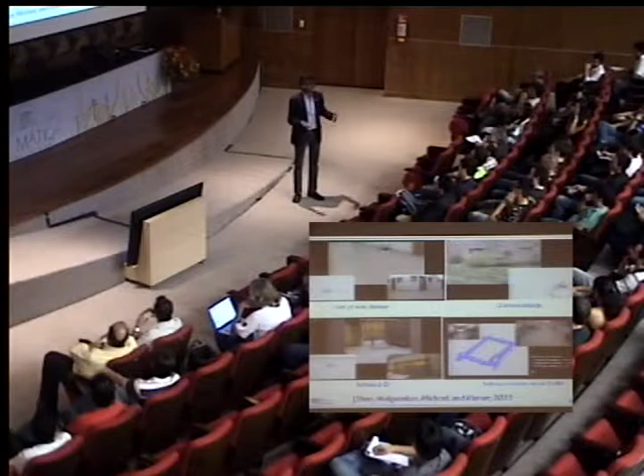So here, the reconstruction that you're seeing here, the map that's being generated here, is not being generated on board. On board, you only have sparse features, and you're essentially triangulating based on that. But if you feed all that data off board to another machine, then that machine can actually do this reconstruction.

And here the main challenge really for us is computational resources. If you can put a lightweight GPU on board, you can do all of this on board. And I think it's a question of time before companies like NVIDIA come up with processors that we can actually reduce to cell phone grade size and power constraints. And we should be able to do all this reconstruction, dense reconstruction, on board.

The one caveat about this is you really cannot use these maps for doing trajectory planning or obstacle avoidance. So in each one of these experiments, the human operator is essentially looking at what the robot sees and saying, go here, and then there. So the high-level planning is done by the human, and the low-level trajectory planning is done by the robot.

And that's because if you just use vision information, it's very hard with today's small processors to do a complete dense reconstruction of the environment, to do motion planning and to do obstacle avoidance. But you can do it at a finer level, the trajectory planning level. And that's sort of where this work is headed. I think it's a question of time before we can do all of this on board.

So in general, if you go outdoors, then you might think about using other sensors than just vision. One of the problems with vision, of course, is it doesn't work in the dark. It doesn't work when it's raining. It doesn't work if there's smoke. But lasers work there, and so our strategy here is essentially to use all the sensors that are available and then fuse this information when possible.

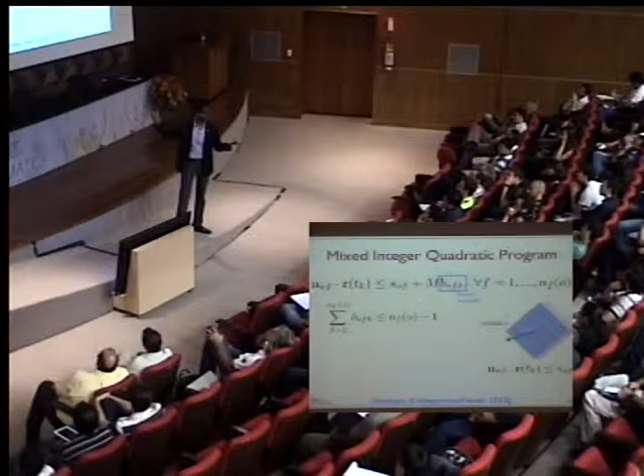So we're going to insist that the sum of the binary variables is at most n_f minus 1 for a particular obstacle. So that gives rise to this. So we essentially make sure that at least one of these for every obstacle is equal to 0. Right? And the others, I don't care. It can be 1 or 0, I don't care. So that's a mixed integer inequality. And now I rewrite my quadratic program, except in addition to this and this, I have a whole bunch of these binary constraints, which are obtained by these binary variables.

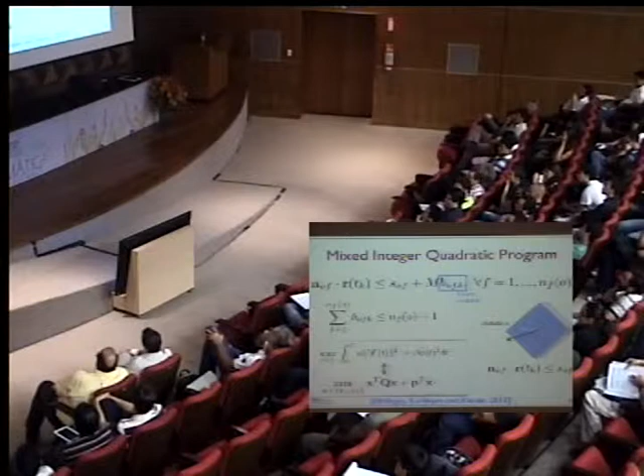So what's the problem with this? If you have n robots and m obstacles, one problem is that the dimensionality of the space increases linearly with n, which is to be expected, right? And there's no free lunch. Size of your quadratic program will keep increasing. But if you have good solvers, this is not where the problem is. The problem comes in really with the number of obstacles and the number of neighbors. So the number of potential interactions is n squared, and the number of binary variables you have to write for obstacle avoidance is n times m.

So if an obstacle has f faces, then for every obstacle you'll have f binary variables, and then you'll have m times f binary variables for your m obstacles. And if you have n robots, for every robot you'll have to have m times f binary variables. So the number of binary variables in an environment like this quickly grows very large, and it doesn't really scale that well. And that's the real problem.

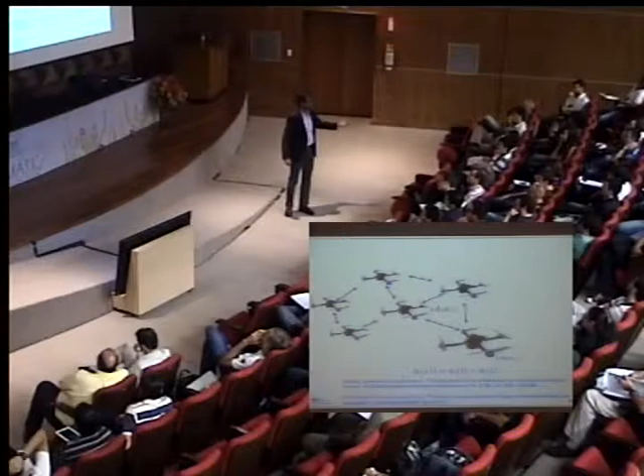So there are some robots that are aware of the global task, and the global task is specified as a trajectory in the position and yaw space. So imagine now you have 100 robots, maybe 2 or 3 of them know what overall trajectory needs to be followed, and the others are only keeping track of their neighbors, right? So you can show if this is a connected graph that in fact the entire team can follow the trajectory. So here's a cartoon video, if you will, work by Katie Powers that illustrates this.

So this guy here is a host for PBS, the Public Broadcasting Service in the US, with episodes called Nova that air every Wednesday. So this shows how the leader-follower concept works. So these robots are talking to each other, and David has essentially hijacked one of our robots and pulled out the battery, and he's basically commanding it. So that robot can talk but cannot do anything, right?

By manipulating that robot, he's essentially able to manipulate the team. Okay, this is not a swarm, but that's because my lab is quite small, but essentially it illustrates the idea. What he's doing with his hands is irrelevant. This is not a human-robot interaction experiment, but you know, he likes to do theatrics, and that's what you're seeing there. But this is a very, very simple idea. Same idea with this notion of anonymity, and this is really Matt Turpin's work.

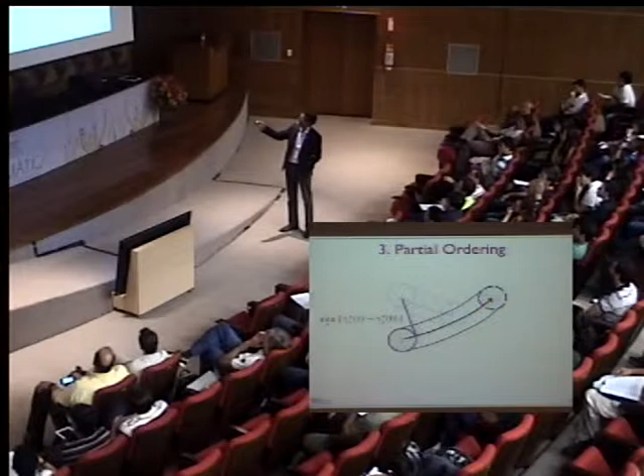Then the third, you have to essentially establish some level of prioritization or partial ordering. And there's a simple test for it, and this has to do with looking at the shortest distance separating the start location of J and this trajectory, which is this perpendicular distance, and looking at the shortest distance from the end point to this trajectory, which is this little thing, and asking which one is bigger, right? Is this less than 2r? Is this less than 2r? In this case, if that's the case, then J gets priority over I.

If this is the case, I gets priority over J. And it turns out in this case, this is true, right? This is actually less than 2r. So I gets priority over J, so this guy will go first, and that's how the priority is assigned. So once you do that, you essentially reparameterize your minimum snap trajectories so that I goes before J. All right, so this incorporates dynamics, it incorporates the best routing, and it solves the assignment problem, and this turns out to be order n cubed.

So for instance, this is just a simulation, but it shows you the kinds of things we can do. For some reason, this video is not playing. So you'll see, this is 100 robots starting from different configurations. They're told to go to goal locations, and on MATLAB, this can be solved in 2 or 3 seconds, in this fairly cluttered environment. Again, these are identical robots, and we're not telling them who needs to go where up front. So they're determining that, and they are finding safe solutions as they go through this.

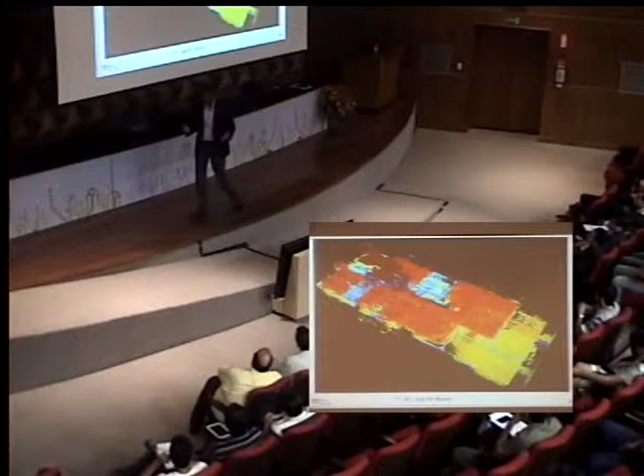And they collect the information, and there's a way to aggregate this information using a cloud of computers that might be located outside the building. You should be able to do this sort of thing just with large numbers. And that's one of our challenge problems.

So a related challenge problem is, how do the robots decide where to go to collect information? And yesterday we were talking about how to detect viewpoints for exploration, how to detect frontiers.

So one of my students, Ben Charrow, has been looking at this idea of using mutual information. If you look at this objective function, I represents the mutual information of the map and the sensory observations, and the sensory observations are made by robots taking different trajectories. So if I determine what xt the robot takes, that tells me what sensory observation the robot is likely to make and how much that will tell me about the map.

So by taking this mutual information and finding trajectories that maximize it, I get the most optimal information-seeking strategies. We can do this for heterogeneous teams, for aerial robots and ground robots. The trajectories I'm showing you are only for a ground robot, but by evaluating this type of integral for both robots, I can determine the best possible strategies.

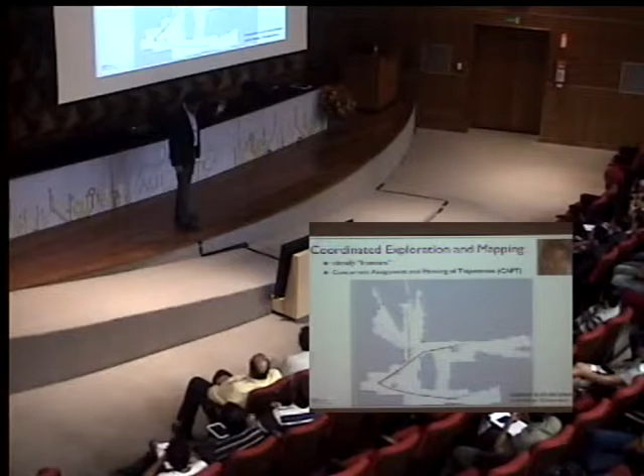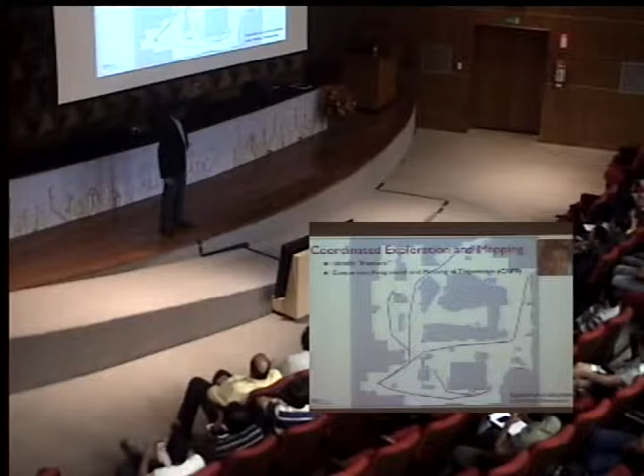Instead, using something similar to what I showed you yesterday, these 4 quadrotors are exploring this environment. Each of these colored blobs represents frontiers to explore, and robots are assigned to these frontiers using an assignment strategy similar to the one I talked about earlier. As they do that, they build this map. So either one of these strategies can be used for hundreds of robots to explore an unstructured, collapsed building.

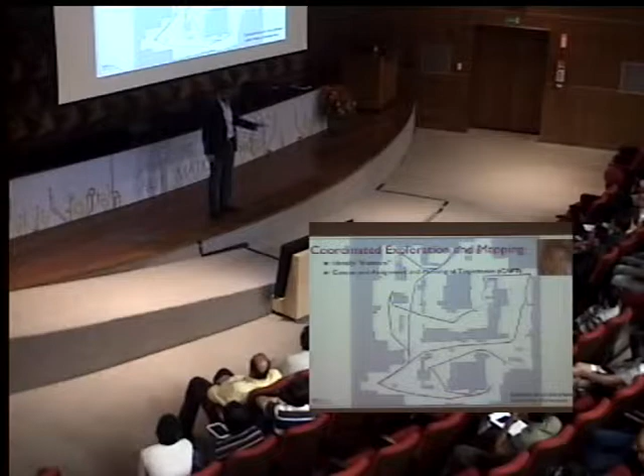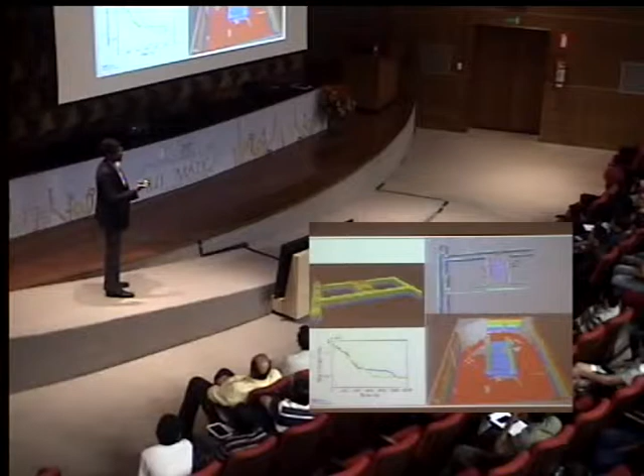Just to show you the kinds of strategies we might get, this is essentially one of our ground robots on top and one of the aerial robots on the bottom, exploring trajectories and concurrently mapping the environment. The information that the ground robot gets and the aerial robot gets are complementary. This is truly a collaborative framework where the ground robot can never look on top of a table, and the aerial robot can never look under the table.

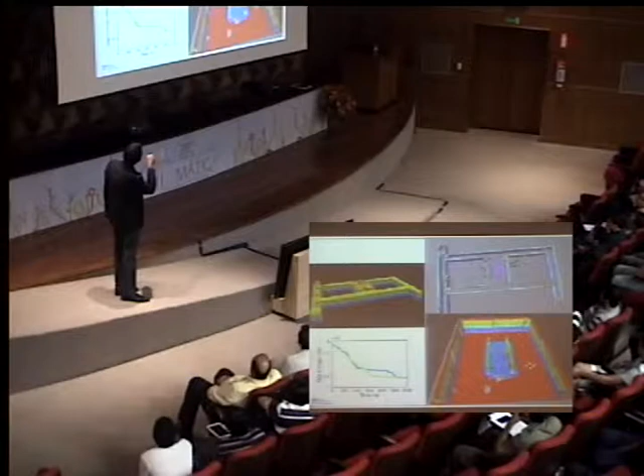But if they collaborate, they can get this 3-dimensional model, and that's what's being shown here. You can see that the entropy associated with the map is declining as a function of time, monotonically, or at least the expected entropy. Together they can construct this 3-dimensional map, and this is the area right outside our lab. Both these robots are doing this, and you have to remember they're starting out with no information about the environment.

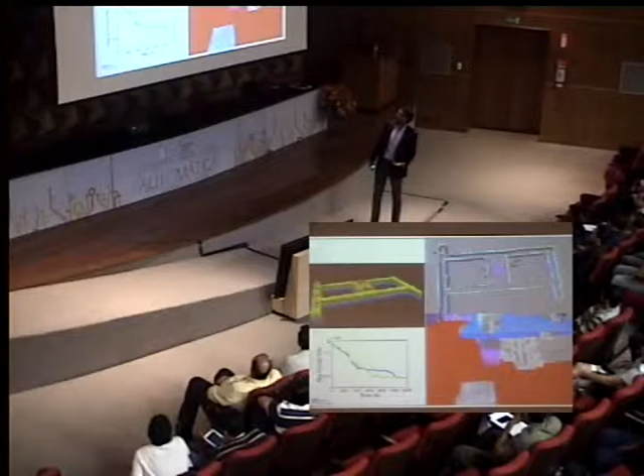So I want to conclude, but let me do this on a light note. I want to show you this video clip that my former students, now at KMel Robotics, created. I hope this video plays.

Or I can use my microphone.

Okay, well, let's watch it carefully. Now, you know all the math that I talked about, right? So you know what is workable for large numbers, and this is all based on this mixed integer quadratic programming style framework. So if you go back, I'm going to play it without sound, I'm just going to play it, that's all.

So if you look at individual motions, these are all real, right? Every one of these is realistic and it was all shot in a studio. Actually, if you go to the website, you'll see each one of these is shot by a single robot that's actually able to execute these maneuvers. And then at this point, you know there's some computer graphics editing going on. So these motions are all correct, but it's easy to edit and duplicate them. Clearly, when they enter the elevator, there's no motion capture camera system, and they fly into the sky, so all of that is computer graphics.

So if your answer was about 25% real, and the rest edited, you're probably in the right ballpark. But you should go look at the Amazing in Motion website, and they tell you how every little bit of this was created, where the technology was used, and where the graphics was used. But regardless of what you saw here, I want to show you this new movie that's coming, The Swarm.